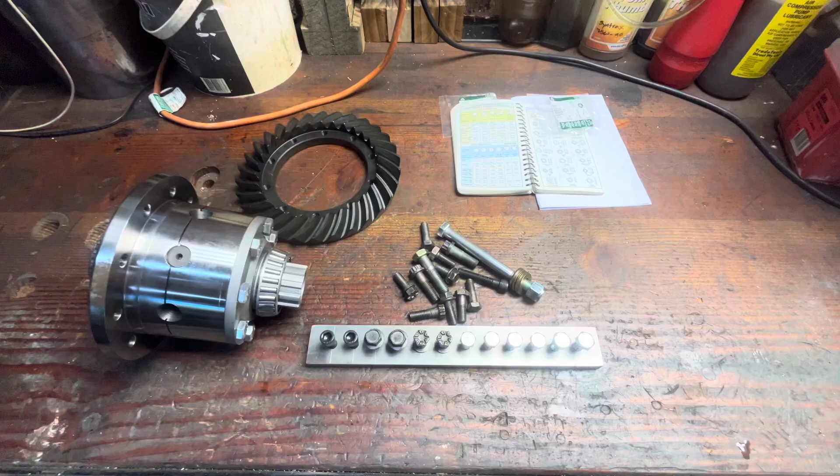I hope it'll be quick or multiple parts, but I'm prone to rambling on, so we'll see what we can do. This is going to be about bolts, mostly focusing on Land Rover type crown wheel bolts and the diff bolts. Reason being is I see a few things lately that are interesting and some things that I don't agree with. And like everyone, I've got an opinion and you're bloody going to hear it.

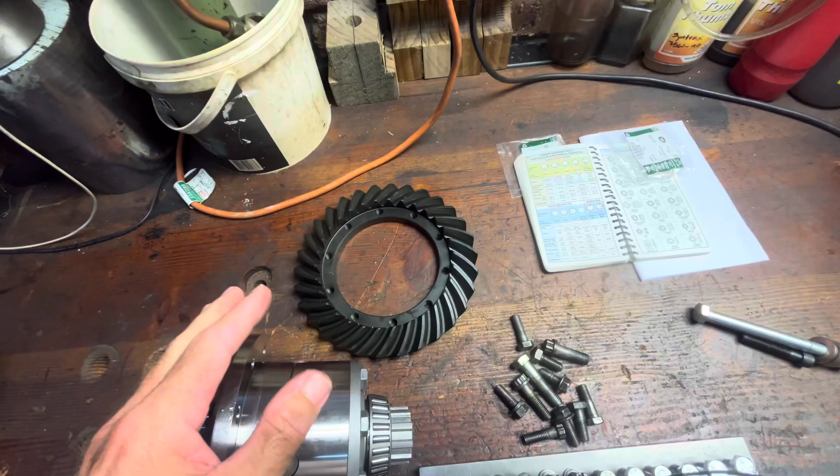But these are a bunch of bolts here, mostly Land Rover genuine bolts. That one's not, that one's not. So with the crown wheel, you may have pulled them apart yourself and you may have seen this particular bolt holding them together. The crown wheel bolted to the diff hemisphere.

Now, just quick note, that's an Ashcroft heavy duty 3.75, and that's a Maxi Drive Rover type hemisphere. There's the locking spline on the side. I can talk about this another time if you want, but this is for my own vehicle, nice strong ring gear in the ratio that suits my needs, and lockable centre diff. Again, a much greater upgrade to Rover, but you may have seen this type of bolt.

And some people will say, hey, they're junk, throw them in the bin, get rid of them, don't even look at them, they're terrible. And the other two bolts you may have seen, genuine Land Rover bolts mind you, are these flange bolts. This bolt here had a run for a few years, starting mid to late 90s, so let's say 96, 97, which then got swapped out at some point by these. I can't tell you when. I think I've seen these on diffs maybe 2010 even, which I was surprised. I thought they stopped earlier than that.

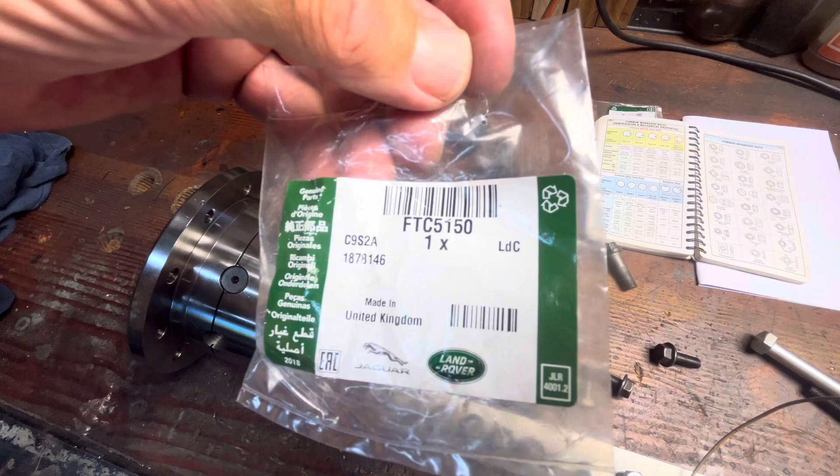But if you buy brand new bolts from Land Rover with the same part number, these both share the same part number, this is what you're going to get, this style. I have two brand new ones here. That's the bag that they came in literally yesterday. Genuine Land Rover bolts. So the old crap apparently bolt was around.

I know I'm not a Series aficionado, so I don't know what the original Series ones had. If you know that stuff, throw it in and let us know if it was a British Standard thread like a Whitworth or a BSF thread. These are all 3/8 UNF. The Rover diff from at least the 60s, maybe even the 50s, 70s, 80s, 90s, right through to the end of the Defender in 2016, 3/8 UNF. So that's the fine UN thread, the Unified National Fine.

The Salisbury is different. Ironically, it's American-based, so it's Salisbury made by Spicer and Dana, or the company name changed a few times in the UK. It's based on an American differential, but ironically, the Poms made it metric. Okay, so they're M12. I'm pretty sure the crown wheel bolts are M12 thread. So we're just looking at the Rover stuff for now.

So they're the bolts you're going to get, genuine Land Rover bolts, if you pull apart a genuine Land Rover diff that hasn't been played with. So most probably those. There would be countless more of that type than either of those types, because they were around for so much longer on so many more vehicles. The flange bolt first appeared on a P38 Range Rover and then was used in some others. I've seen these on D2s and I'm assuming definitely some Defenders as well.

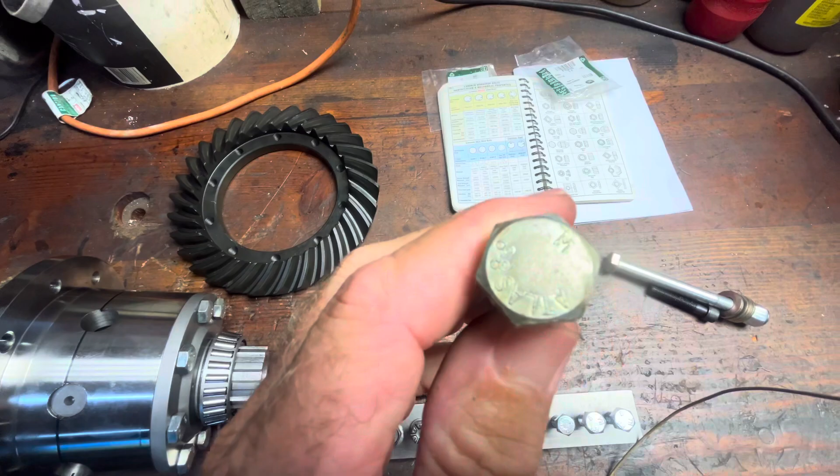So these are all automotive bolts, like I said, except for these two. There's 12.9 on that one. 8.8 on that one. So there's a few numbers and markings on them. Where's one that doesn't have that on it? So no, that's not a good indicator.

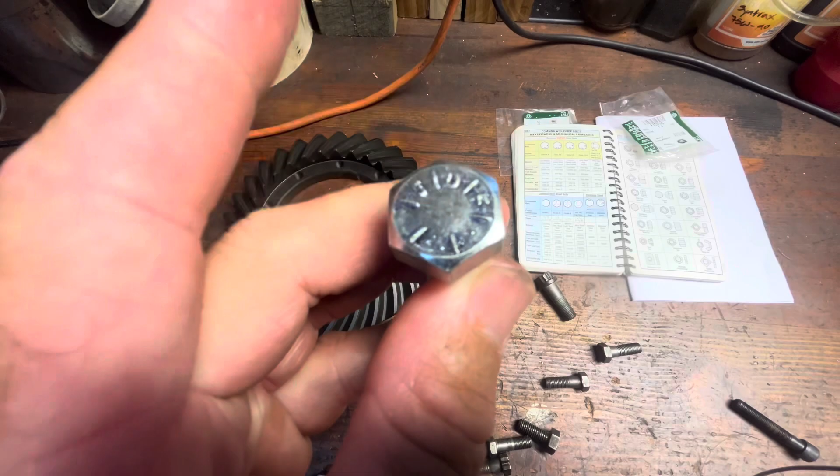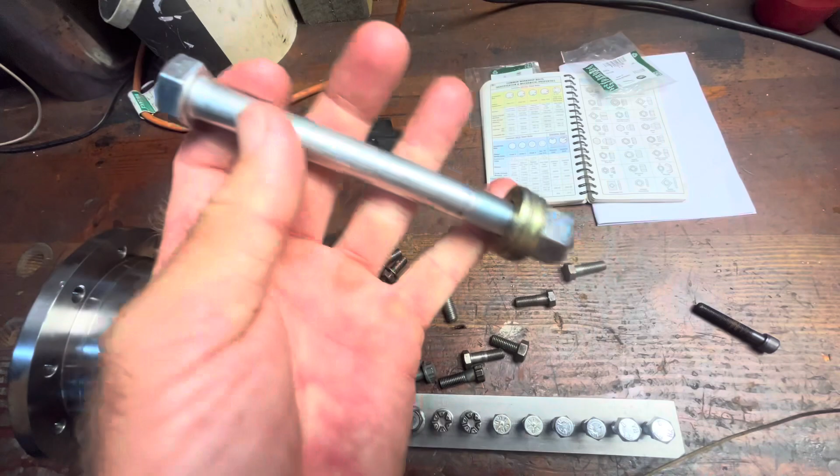This one here, a Land Rover bolt, see there's radial markings that come out. Forget the letters. The letters are probably just manufacturer's markings, but those lines or dashes that radiate out from the centre, that is a representation of the strength of that bolt. Just like on the metric bolts, the numbers represent the strength. The metric system refers to class or classification. The imperial, the UN, UNF, UNC, they call it grade.

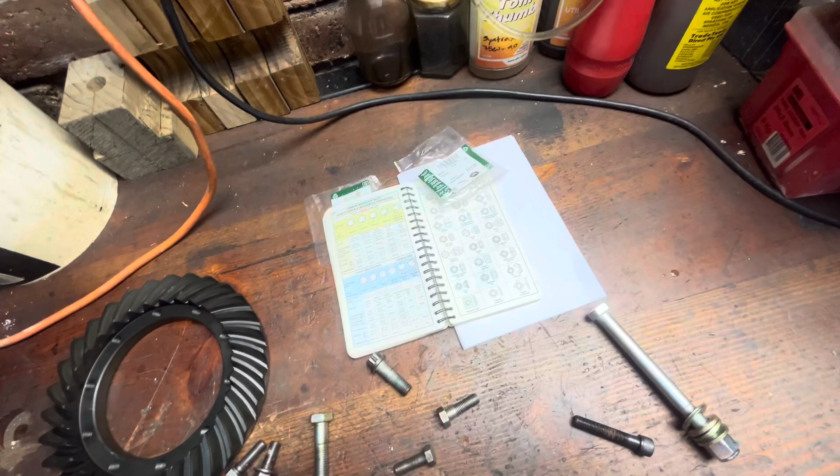So this is a grade 8. Even though there's 6 dashes, it's called a grade 8 bolt, and those dashes represent that it's a grade 8, and then grade 8 represents the strength. This here is a class 8.8, and that represents the strength, just like you'll have some, say this one here, 12.9, that's a brake rotor to hub bolt.

This one here is a caliper, brake caliper to swivel housing bolt, that's 10.9. This big one here is actually the carrier bearings. So this is a carrier, these are the carrier bearing caps that go over these and secure this into the cast iron housing. They are these coarse thread, and I'll get to why they're coarse, but they're class 8.8.

The crown wheel bolts that we have that are stamped are both stamped 12.9. This bolt is not stamped. I am not 100% sure if those radiating reliefs in it represent the grade, as in grade 8. And the reason I say that is because there's a reason behind this head design, which I'll also get to.

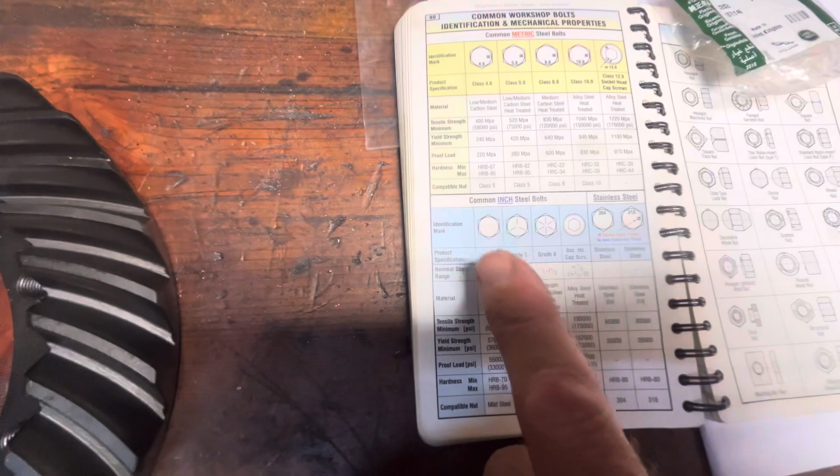But the irony of it is these are imperial thread, 3/8 UNF, and they have a metric rating system. My guess for that is that under the SAE, one of the governing bodies that set the standards for the UN thread system, which is the Unified National Thread Standard, and there's UNF, UNC, UNS for special, UNR for radius, they have grade 2, grade 5 and grade 8. And then they have socket head cap screws. They don't have anything above grade 8 that they officially recognise at this stage.

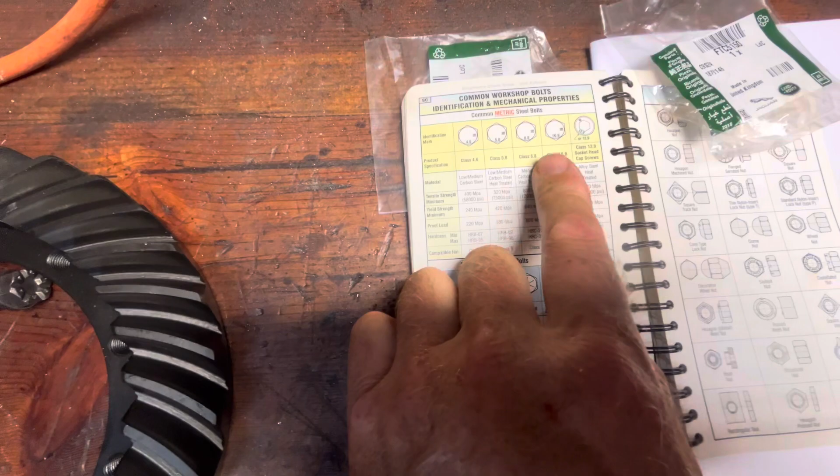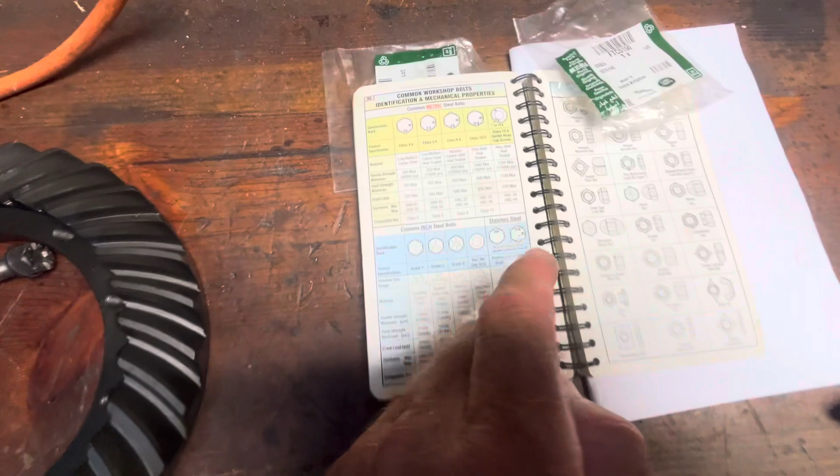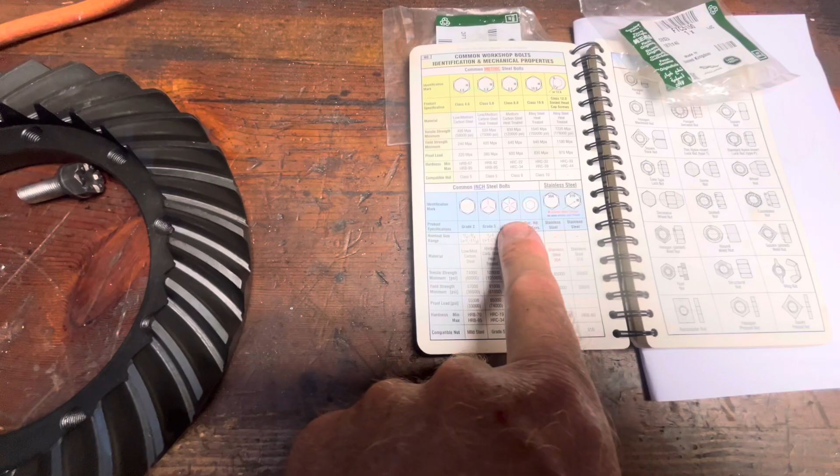Metric have 8.8. There's also a 9.8. It's very rare, but it exists. There's 10.9 and then there's 12.9. So my guess is that Land Rover spec'd what class or strength of bolt they wanted and a 3/8. Normally they would mark this with an imperial marking, but there is no rating for this strength. If you look at 12.9, it's 176,000 psi tensile strength, or 1220 MPa. If we go to grade 8, which is their recognised highest, it's only 150,000.

So I think that's why this is weird, because you normally never find imperial bolts with metric markings on them, and that's definitely a metric system, and it's definitely an imperial bolt. So there is such a thing as grade 9, but it's not fully recognised yet. There's some very good quality bolts made in grade 9. There's probably some junk as well, but Holo-Krome make grade 9. There's a few companies in the States that make grade 9. I believe earth moving equipment, Caterpillar, and possibly bigger John Deere, make some very high quality bolts, and some of those are quite high tensile strength.

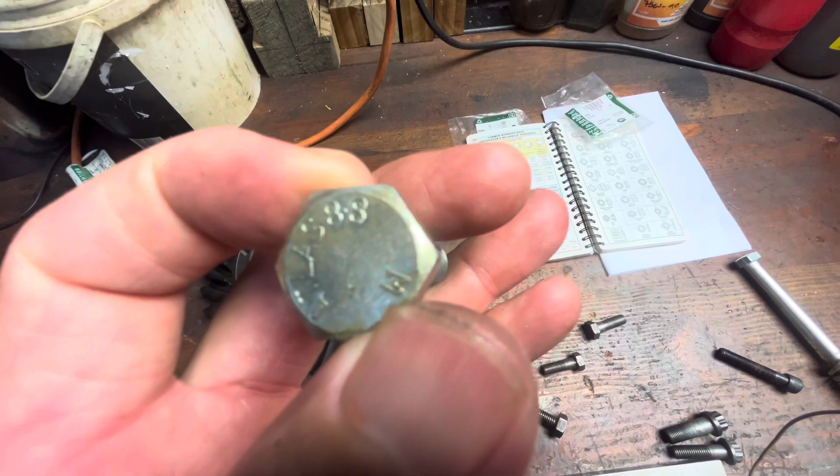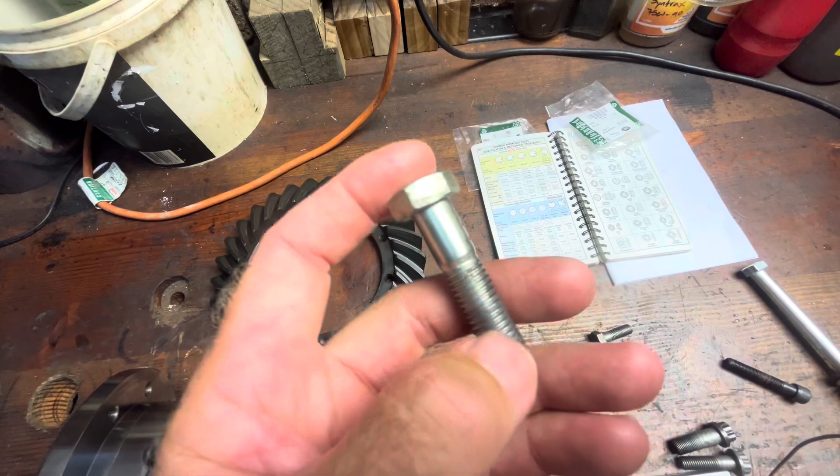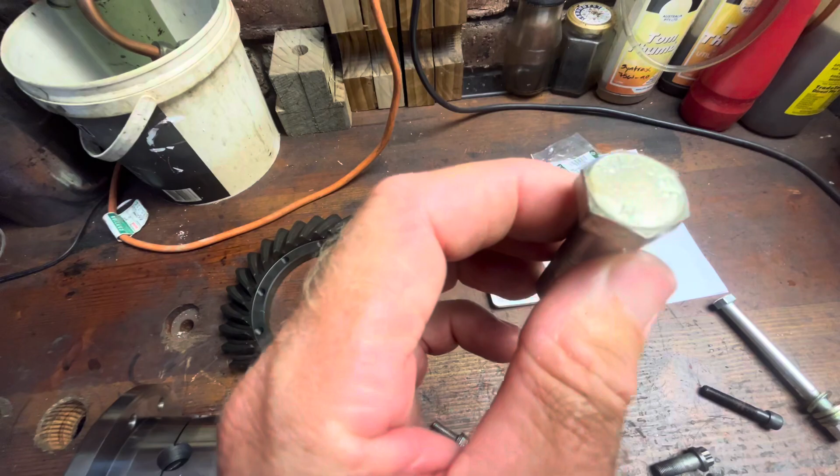The metric system's interesting in the sense that the numbers actually relate directly to the strength. So when you've got 8.8, you've got 8 times 100, 800 is the ultimate tensile strength in MPa. Tensile strength is if you were to get this bolt and stretch it lengthways until it snapped. So there has to be a minimum requirement, like the 800 MPa minimum, to class that bolt as an 8.8. The 0.8 is 0.8 of that 800, which is the yield strength.

Now yield is if you stretch this bolt a little bit, it's steel, the steel will return back to its original length if you don't go to yield or beyond. So you can stretch it, it'll come back once you release the pressure. So yield is the point that it will no longer return back to its original length. So 0.8 of the 800 is the yield strength. So you've got tensile strength and you've got yield strength. They don't mean much to me and you, other than the fact that if that's what's in the part from factory, that's what the engineers have designated as a requirement for the job.

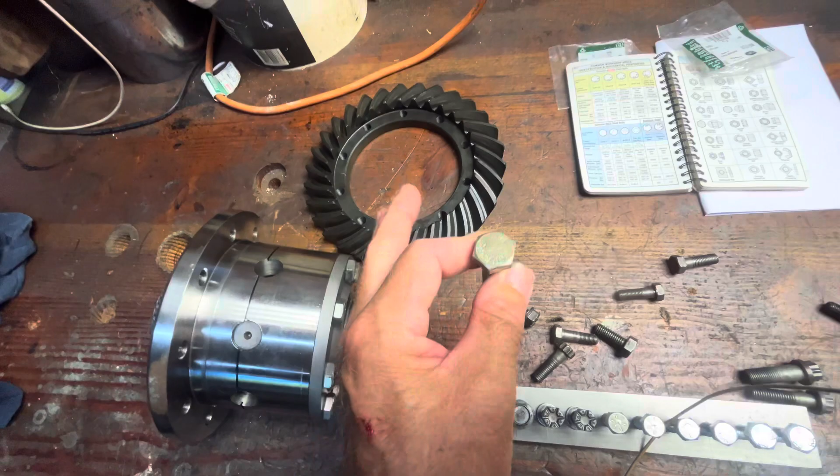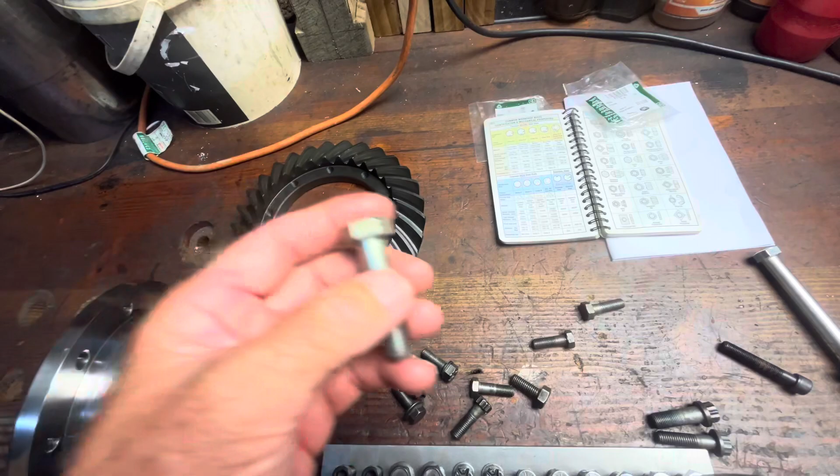They look at the problem, in this case it's attaching the ring gear to the flange of the carrier, or the carrier bearing cap bolts retaining them down. They look at all the forces involved under normal circumstances with normal size tyres, factory tune, factory gear ratios, factory weights, and they'll say, okay, there's X amount of force at the worst, and we need this to clamp it. This is all clamping. So the bolts are classed so they can be identified and meet standards. The engineers can pick from a range of approved specifications of bolts for their requirements. So you and me, we're not choosing that. We're just saying that's what it is.

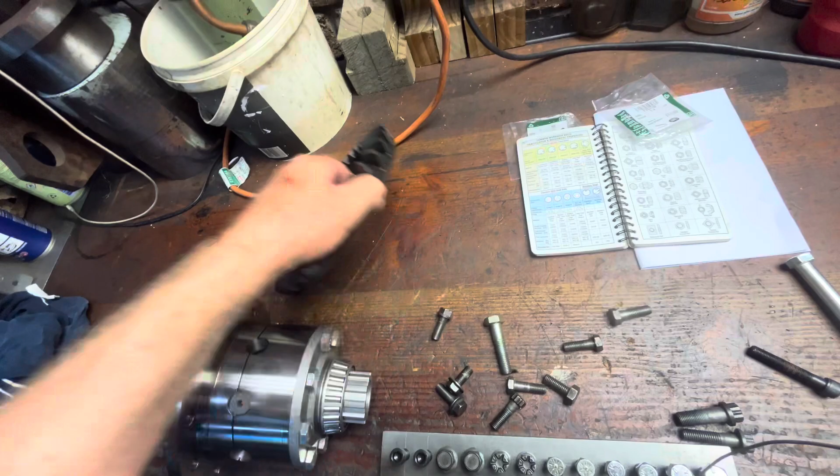Different bolts, different lengths, different threads, and strengths depending on the job at hand. Most of the bolts, if things are well designed in a mechanical drive line, will be loaded mostly in tension, maybe even in theory only in tension. I believe you will see potentially some shear in these, but mostly it's clamping force that creates friction between the back of the ring gear here, or crown wheel, and the face of this. It's that clamping force that creates a lot of tightness, the two surfaces' friction, and that's what stops it actually spinning and therefore shearing the bolt.

So you get enough clamping force, you get X amount of friction, and it's going to overcome any resistance to actually spinning and shearing. So bolts are all rated in tensile, so tension, this way. They're not rated in shear. That can be figured out; there's formulas for that. I'm not an engineer, so we're just looking at what comes with them and what's going on, and a bit of why this was.

The other thing about automotive bolts: if you go to a nut and bolt shop, fastener shop, I don't know what it's like in other parts of the world, I can only talk for Australia, the bolts you're getting are considered industrial bolts. They're set lengths and set thread lengths depending on the length of the bolt. Land Rover, when they're building their vehicles, specify their bolts so they can choose how much smooth shank or grip length they come with. Some will have none.

That's a stub axle 10.9, stub axle to swivel housing bolt. That's got none. The caliper bolt's got that much where it goes to the ear of the brake caliper. The rotor bolt's got that much, so I have a feeling the things where they think they're going to see a bit more shear possibly have that. It's really good practice to have that sort of thing in a non-threaded portion like there. Will that pass through? No, it won't.

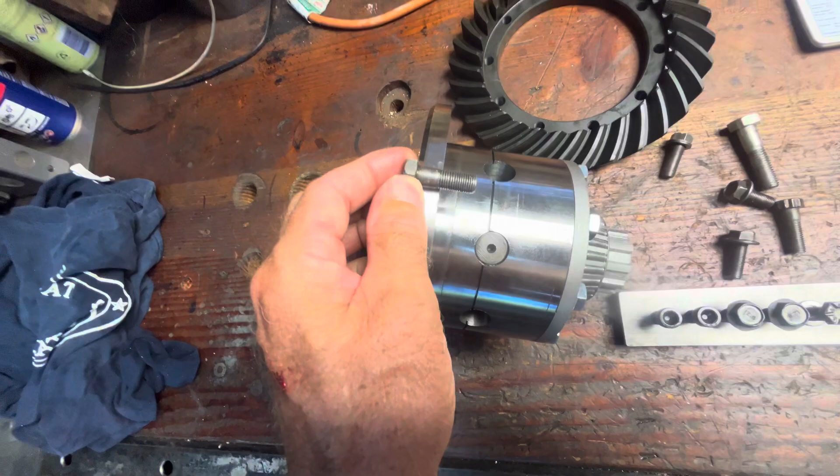No. So, that one either not. So you've got a non-threaded section through there. They deem whether it's necessary or not. Clearly not. So I like the idea of it. It's very important where this ends in relation to bottoming out. If you had too much smooth section and you were tightening this, and it wasn't super obviously long, only just a tiny bit long, but it was bottoming out, that created friction, which would give you a higher reading on your torque wrench, but you wouldn't be getting the clamping force.

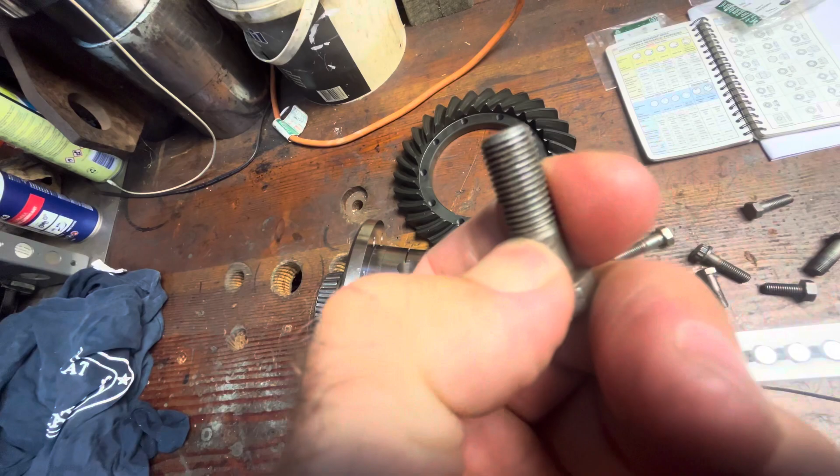That's a problem. The other problem is where the thread meets the smooth shank, right there where my thumbnail is. That's the weakest part of that bolt. Let's say we're not bottoming the bolt out. Where that thread meets that smooth shank, that's the weakest part of that type of bolt. You don't want that in the line of the crown wheel and the hemisphere, because right at that line is the highest point of stress against the bolt. So you want it maybe one or two full rotation threads back. That's good practice.

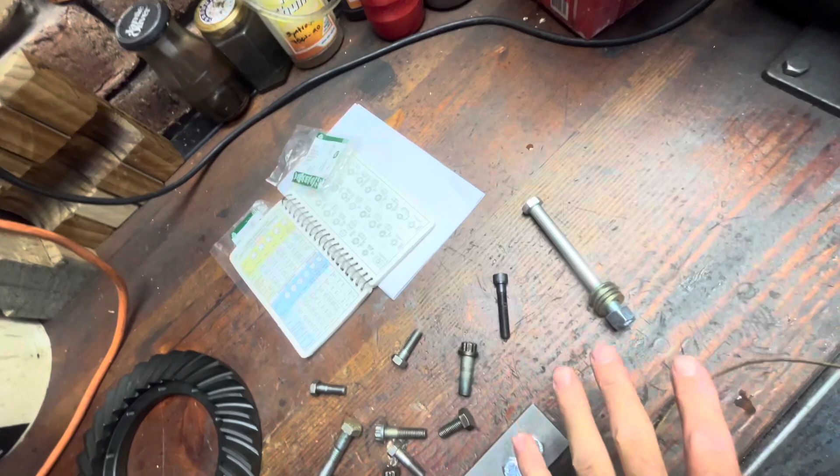But like I say, Land Rover don't deem that necessary in this application, rightly or wrongly. That's just what they do. This old school one has a little bit. Again, that could be more to do with the design of this bolt, and we'll talk about that in a sec. Land Rovers have some metric bolts, especially from the 70s or early 80s onwards, and they have some imperial bolts.

My Defender's a 98 model. It's mostly metric, but the rear A-frame still had imperial bolts, half-inch UNF at the A-frame bolting it to the A-frame arms, and the A-frame arms and bush to the chassis are 3/4 grade 5. I think these ones here are UNF grade 8 at the A-frame. My vehicle is in the middle of being completely modified. I've made all new suspension components, all new links and everything. I'm using the A-frame, and I'm using what Land Rover used.

And I've bought brand new brands that I know, like for us, Hobson or Brighton Best, good quality bolts with the correct length of shank. I just work with what I can get when designing stuff as well. So the vast majority of the bolt through the two parts or three parts or whatever and brackets is all this, and the thread is only where the nut is and the washer.

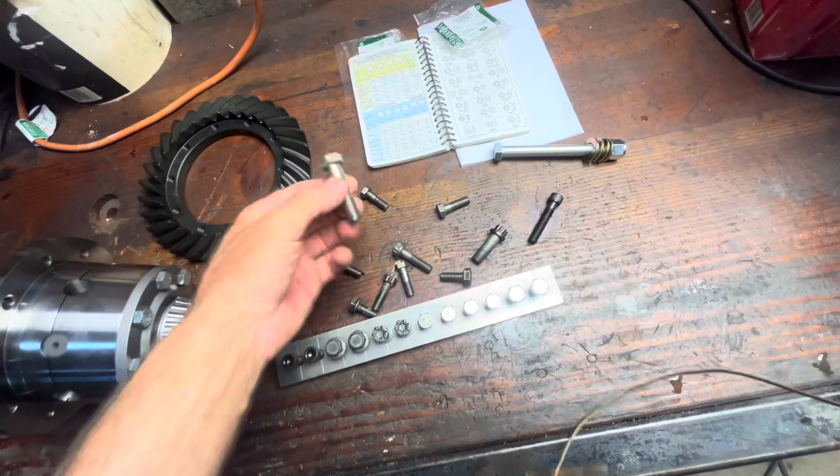So we don't always have that luxury, especially if you're buying bolts from the shop. A bolt like this, if you bought it from the hardware or the nut and bolt fastener shop, at that length would be fully threaded. You wouldn't get any smooth there. So there is often a good reason to buy automotive, your Land Rover bolts for your Land Rover.

The other thing too, from personal experience, aftermarket brand Land Rover bolts, I would personally steer clear of them. I've bought some brand new, opened them, put them into parts and purposely broken them, because I was suspect on the quality of them, and they were marked 12.9 and they would have been lucky to be grade 8, or I suspect they would have been closer to class 8.8. They were horrific. And they were part number for part number. They were not genuine Land Rover bolts.

And that was just enough for me to say, I am never trusting them. And these were structural bolts. These were swivel ball to axle housing bolts. And there's no way you want to put something inferior there. So a lot of the Land Rover stuff, we can have a laugh, but a lot of these bolts are good quality. If they're in good condition, they can be used again. They're designed to be used again, unless it specifies in the workshop manual one use only, or throw away, or only use new bolts.

Some head bolts on engines are torque to yield, and you use them once, you install them correctly, and then if you ever have to take the head off and the bolts out again, they go in the bin. Of all the workshop manuals I've read, and I'm talking genuine Land Rover workshop manuals, not reprints by other companies, so far I have not seen anything about crown wheel bolts being one use only: you must use new bolts, throw away the old bolts.

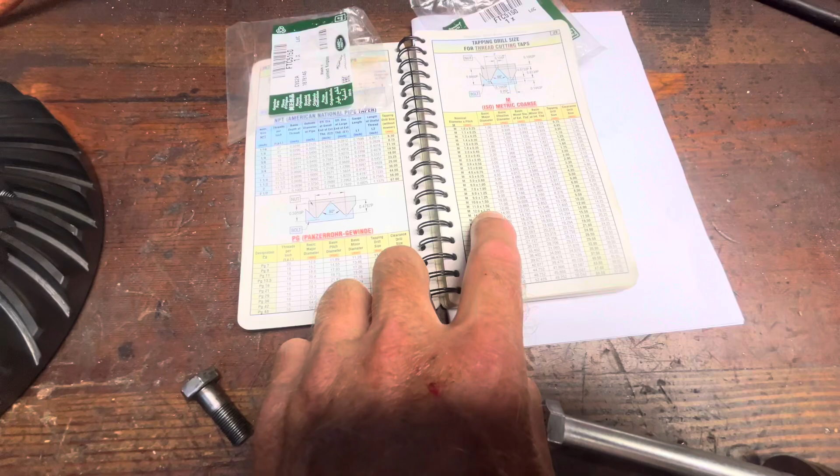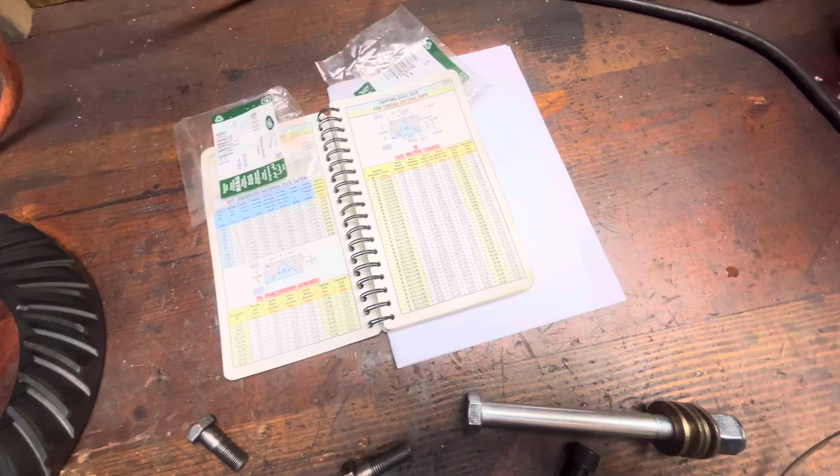The Imperial system uses numbers of threads per inch. The 3/8 bolts are 24 threads, so they're designated 3/8-24. So 3/8 is the nominal diameter, and the thread is 24 threads per every inch. Might be 16 for another one. It could be more or less.

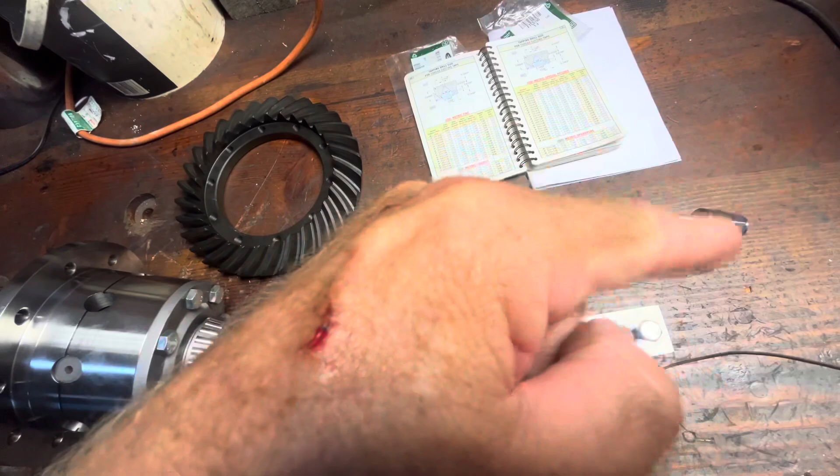So there's these thread pitch gauges, tiny little combs, precision made, and you hold that comb with the teeth in the thread, obviously the correct pitch gauge for your particular bolt, and if they don't all sit in there evenly, you've probably got a problem with your bolt. So always take a good look at your threads on your bolts.

You should be cleaning them anyway when you're reusing them, whether you're lubricating them or Loctiting them, they definitely need to be cleaned. The holes, again, make sure they're clean. Little bottle brush, wire brush sort of thing in there, toothbrush, whatever. Don't run thread cutting taps in these threads to clean them. Last case, worst case, if you had to, but I just don't recommend it.

You can get things called thread chasers. They're specifically designed to clean up threads. They're like a thread tap, just a tiny bit different in size, and they're not sharp cutting edges. So you can spray a heap of brake cleaner in the holes, whatever you choose to clean the threads up with, to eat whatever's in there, your Loctite or whatever, and then run your thread chaser in and make sure they're really clean. If you're reinstalling something brand new like this, I'll give it a really good clean in parts cleaner, make sure it's really clean.

But the point is the bolts are designed through engineering to clamp a certain load, to not fail under installation, and to meet those requirements. Where we come into a problem with our four-wheel drive, if we've upgraded the power, changed the gearing, certainly bigger tyres, tackling harder obstacles, we're putting bigger shock loads, and asking the same thing to do more than it possibly was designed for. So we can upgrade this part, we can upgrade this part. Can we upgrade the bolt, or is there a need to, is the question.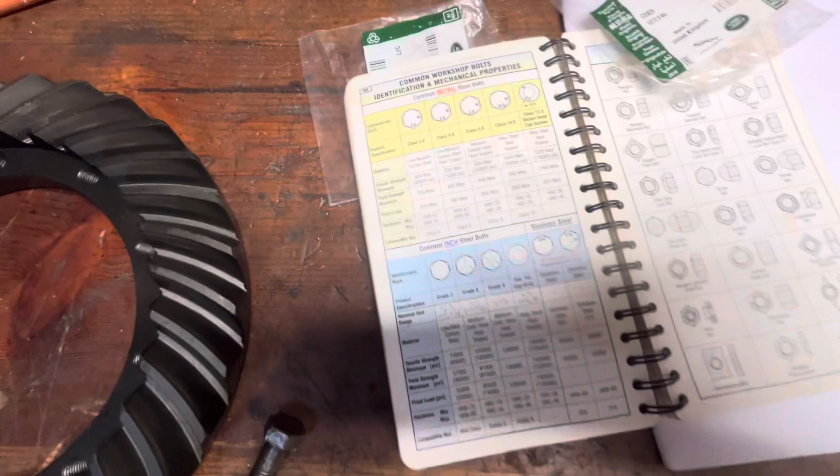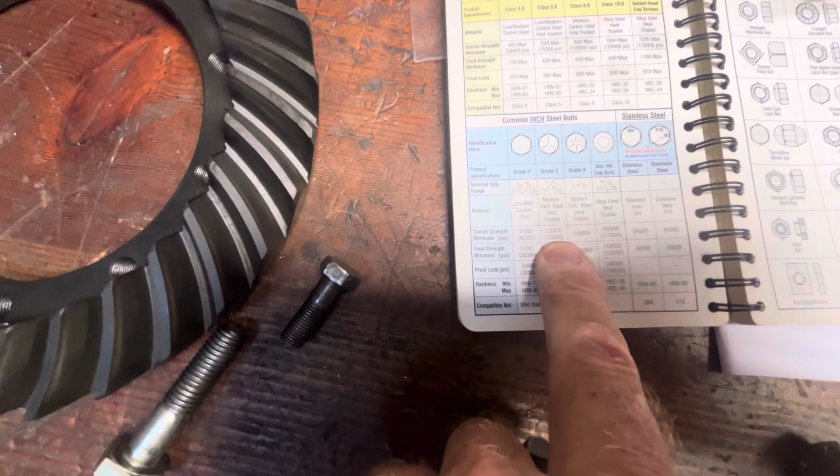Now, given some research into torque settings for 3/8 UNF bolts, grade 8 and even higher, being at around 45 foot-pounds puts this at least grade 8, not 8.8, because 8.8 is only equivalent to grade 5. And if we go back to the little tables in the little engineering handbook, 8.8's there, 120,000 PSI. If we go to grade 5, 120,000 PSI. So grade 8 is 150.

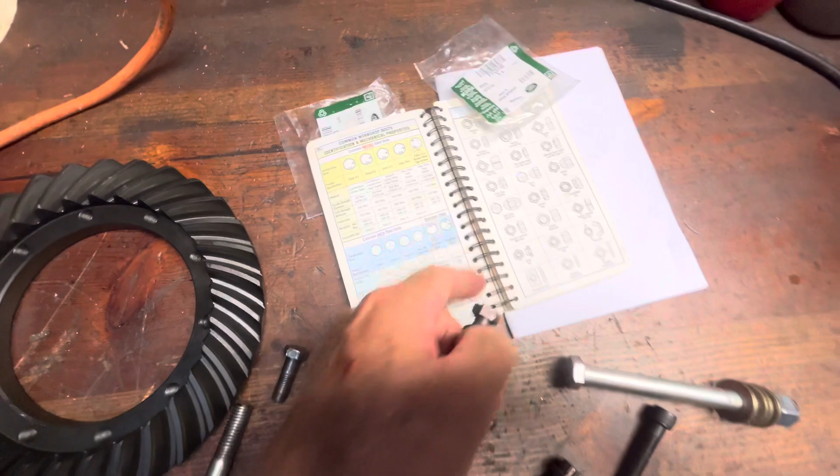I suspect that these are at least grade 8, if not getting closer to 10.9, or sorry, 10.9 is grade 8, sorry, 12.9, given the torque values for installing these. And all the torque values in the Land Rover workshop manual are with Loctite, so that's a lubricated torque value.

Because if you look at fairly good torque charts that are just generalizations for torque for bolt sizes and threads, they might have at least 2 or 3, or they'll have a little asterisk next to the numbers, and a little chart down the bottom that'll say plain black threads, that's a plain black thread. There's no coating on that other than the black phosphated coating. They'll have one for zinc.

Now, I think most of the time the black, whatever the chart will say, will be the rating or torque value for this plain black bolt, dry, no lubrication, clean, dry threads. This one being zinc, I think it's 70% of that roughly. This is a light, electroplated coating, because it's a little bit less friction. And then they'll have one for lubricated.

So the fact that Land Rover give their rating with Loctite, Loctite acts as a lubricant. It's going to be based off a lubricated thread installation procedure, and yeah, I think these bolts are going to be pretty bloody good, to be honest.

What I've done here, I've got some 15mm thick 1020 steel that I had lying around, some bright bar or cold rolled steel or whatever you want to call it. It's better than mild steel. It's not a chromoly or anything, but it's a little bit better than mild steel. I've drilled and tapped it for all these bolts. These are all 3/8 UNF except for these two, which are metric 10, M10, and they're coarse.

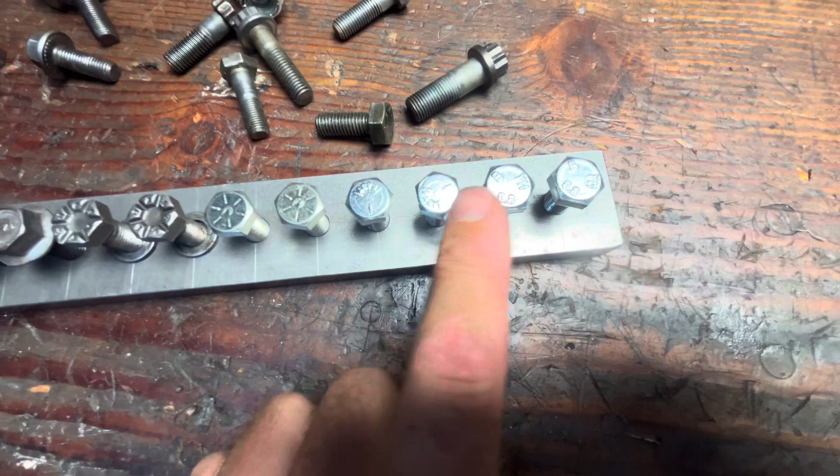Now the reason being that is to give us an idea. I'm going to break all of these bolts with a torque wrench, and it's pretty unscientific, but it's just going to give me a bit of an idea, and then I'll post up the results in another video. I want to see what 8.8 is, and that should be the same as these. So these are grade 5, these are grade 8. We're assuming at least grade 8 unknown. 12.9 as the genuine Land Rover bolts that came in the blister packs, and these are socket head cap screws, which are 12.9 as well.

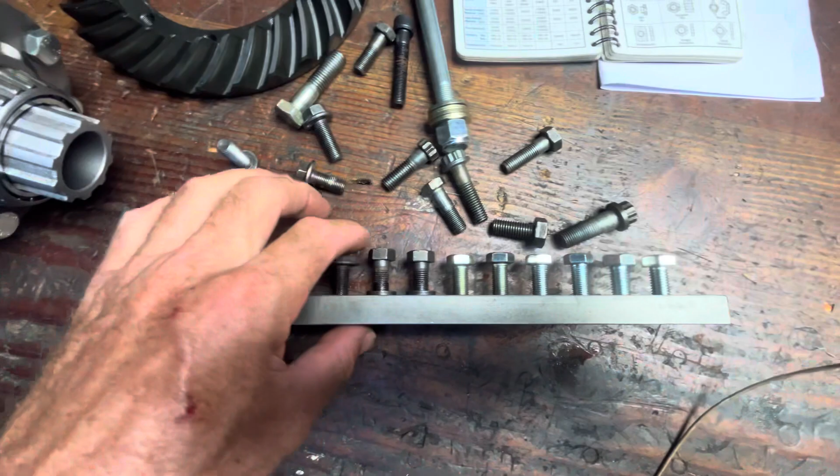Unfortunately you can't buy an 8.8 in a 3/8 UNF. So what I looked at was the root diameter, or the smallest diameter of the bolt, and they're all fully threaded, and they're all 25mm long, except for the special Land Rover ones, which are what they are. But the root diameter of the metric 10 coarse is within 0.02 or 2 hundredths of a mil, really close to the same root diameter as that. Now, yes, the thread pitch will create different stresses, and there are variables. Like I say, I don't consider this scientific, but it's not completely unscientific.

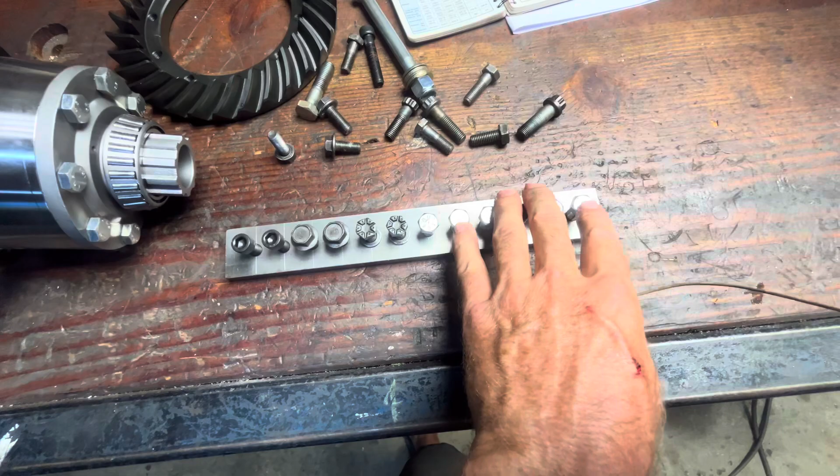It'll be interesting to see what torque values I can do these up to, and then if they actually just snap. It's not a tensile strength because we're twisting it. I will have some 10mm flat bar in here with holes in it that don't rub on any of these. That'll be the same as this flange, and then the same thickness as the crown wheel, and I'm going to see what they break at. I'm just interested. These give me some sort of base number to work off, and it'll be interesting to see what these and these break at. I know I've broken socket head cap screws before, incredibly hard to break them. It'll be interesting to see if these come close to those as well.

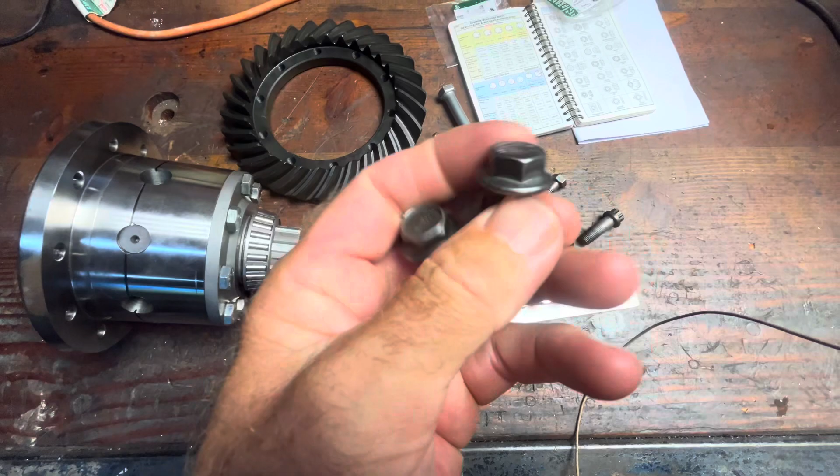You can't buy this particular bolt. There's no different part number for it. I haven't been able to find a supplier for it. You go to Land Rover, you ask for the part number, and this is what you get. These are the two versions, brand new out of packet, which are identical to this one. So they've probably gone to these because it's easy to get a quality supply. There's been some failures with these.

The problem with the socket head cap screw is the reduced head area. These are a machine screw. They're often used in machining and machine tooling because they can counterbore these into a pocket very easily. That reduced area is a bit of a problem. Now, if you're ever using socket head cap screws and you're using them for their strength for a reason, you must use them with a ground and hardened washer.

If you use them with anything other than a ground and hardened washer, and this is the same for all bolts, mind you, but it's especially important for these with their reduced head area, the clamping force that you're creating by torquing it to a set value is going to crush and deform the washer to a degree. The first time that part sees a shock load, that shock load will crush and deform the washer. And the problem with that is now you have reduced your clamping load. If you don't have the correct clamping load, it's the same as not doing the bolt up tight enough. It is as bad as over tightening it to deformation, whether you've deformed the bolt or the threads in the receiving end.

There have been tests done, and I'm saying proper tests by the associated people, SAE, so forth. An example is taking a high quality, high tensile bolt, and the torque that they did it up to was 40% of its tensile strength. They loaded that bolt with a set weight and ran it through a fatigue cycle. They got 6,000 cycles out of that bolt torqued to 40% of its tensile strength.